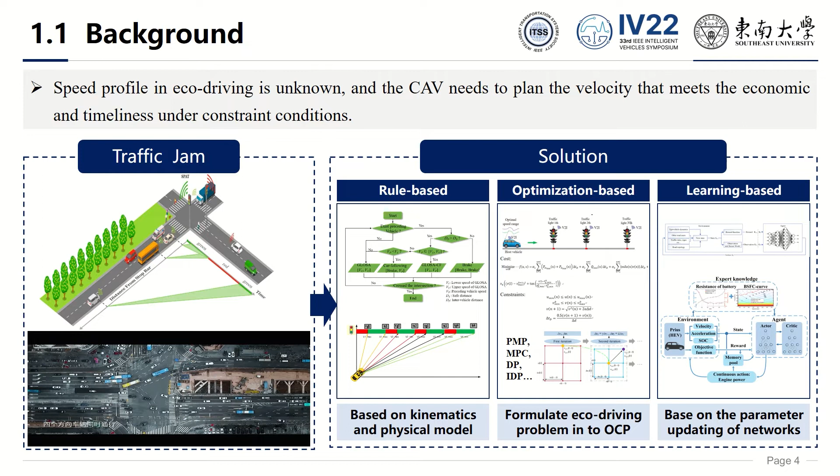However, it is difficult to achieve real-time eco-driving control for hybrid electric vehicles, since the speed optimization and powertrain energy management should be solved simultaneously. Therefore, we proposed a hierarchical control structure to solve the ecological speed planning and optimal torque distribution respectively.

Existing research usually focuses on series or parallel configuration HEVs and lacks comprehensive consideration of energy consumption factors. Especially for power split hybrid electric vehicles, we should consider the powertrain dynamics for precise optimization. Thus, we introduced an equivalent fuel consumption model to train an agent through proximal policy optimization algorithm.

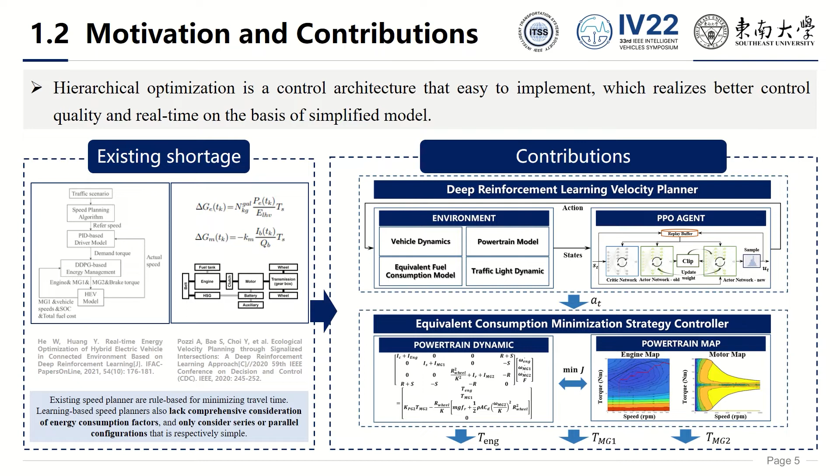It provides acceleration to the bottom energy management system. We applied an equivalent consumption minimization strategy, ECMS controller, in the bottom stage for real-time optimal torque distribution. Then I will introduce the methodology of this paper.

Toyota Prius is a classical power split hybrid electric vehicle, which is selected as our vehicle model. Its hardware structure and vehicle parameters are shown on the left, and its longitudinal dynamics and powertrain dynamics are shown on the right.

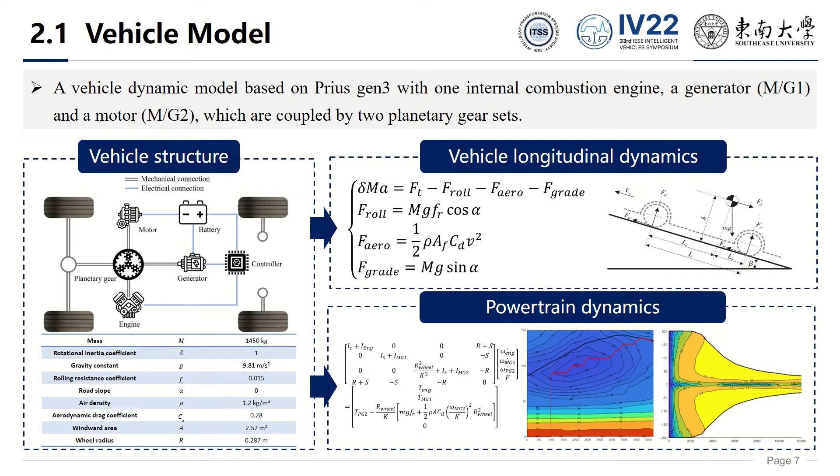In order to balance the computation and accuracy, we proposed a polynomial-based equivalent fuel consumption model to approximate energy consumption. We selected 7 different driving cycles, including NEDC, FUDS, HWFET, etc., and adopted dynamic programming to solve the optimal control in these driving cycles. We applied a constant equivalent factor with SOC penalty to convert battery energy into fuel consumption

for each step. Thus, we can obtain the equivalent fuel consumption in different power demands, and finally use polynomial fitting to get an equivalent fuel consumption model.

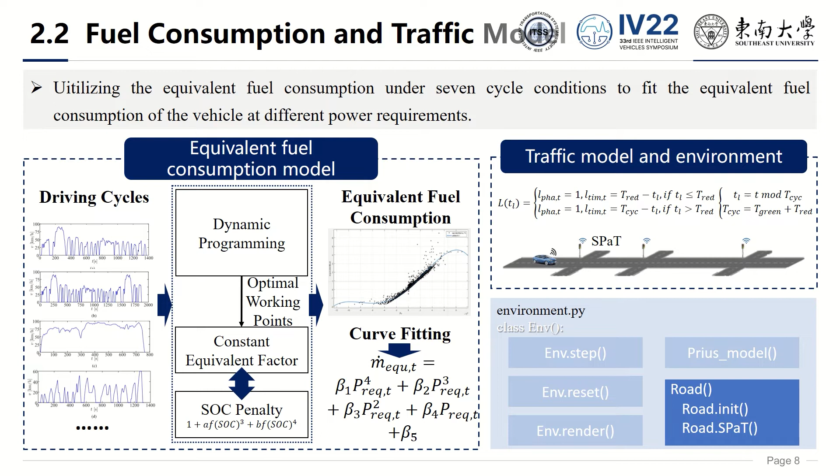In the traffic model, we ignore the yellow light for safety, and the traffic state function is shown in that equation. We assumed that the connected vehicle can only obtain the signal phase and timing information or SPaT information in the current intersection. The environment model is open access. If you are interested in it, you can get it in my GitHub.

Unlike traditional deep learning with labels, reinforcement learning needs to estimate state action value, and the advantage function is widely adopted. The loss function of the policy network or actor network in PPO is made up of the clip ratio epsilon and the advantage function A pi. PPO updates the policy within a trust region by the clip ratio, which guarantees the policy improves monotonically.

The overall objective function is listed here, and the constraint on the right should be satisfied by the bottom controller.

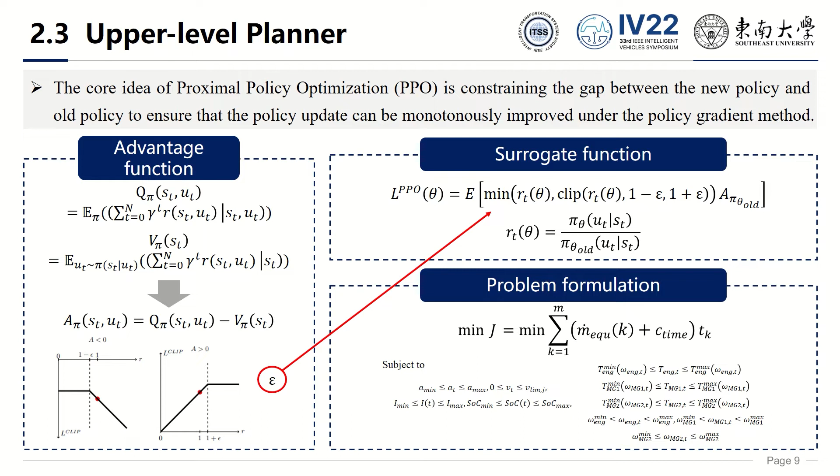ECMS is a classical energy management method for HEVs. The selection of the equivalent factor affects the optimization quality. ECMS calculates the cost table under the current power demand and finds the control output with minimized cost. We adopted a constant equivalent factor with SOC penalty to adjust equivalent fuel consumption.

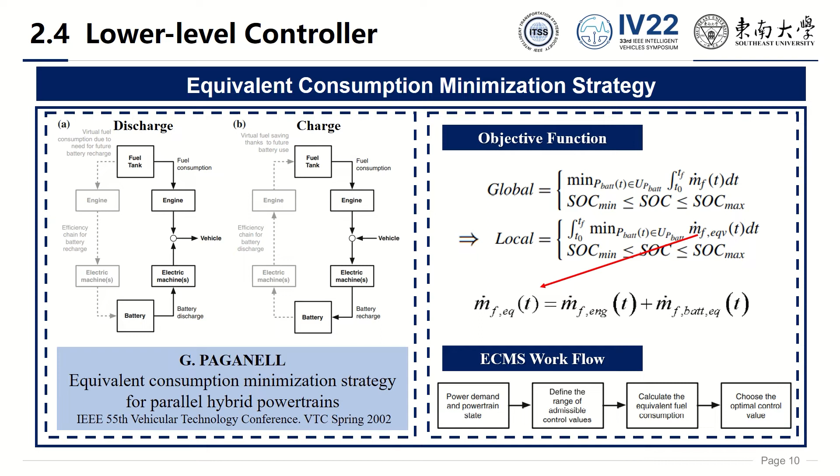Then I will introduce the simulation and the simulation result part of this paper. The deep reinforcement learning training is carried out under PyTorch framework and a custom gym environment. The version of Python packages is listed here. The hyperparameter is shown in table, and we choose an 8,000 meters road in Nanjing with 6 intersections for training. We discretize the simulation in space domain.

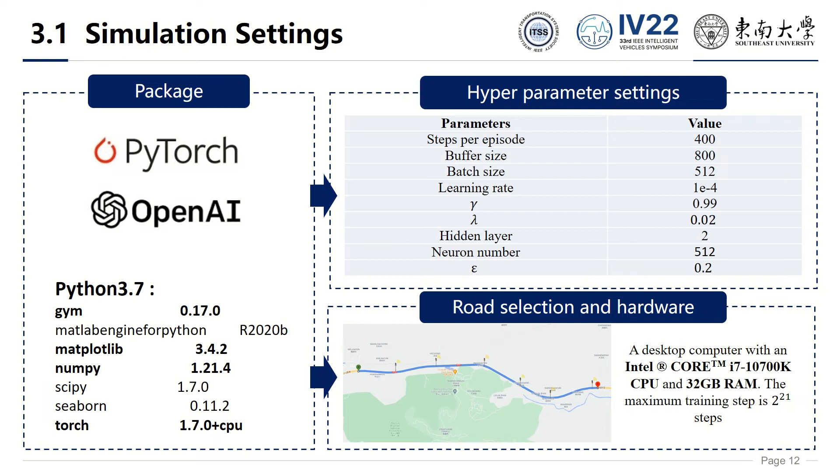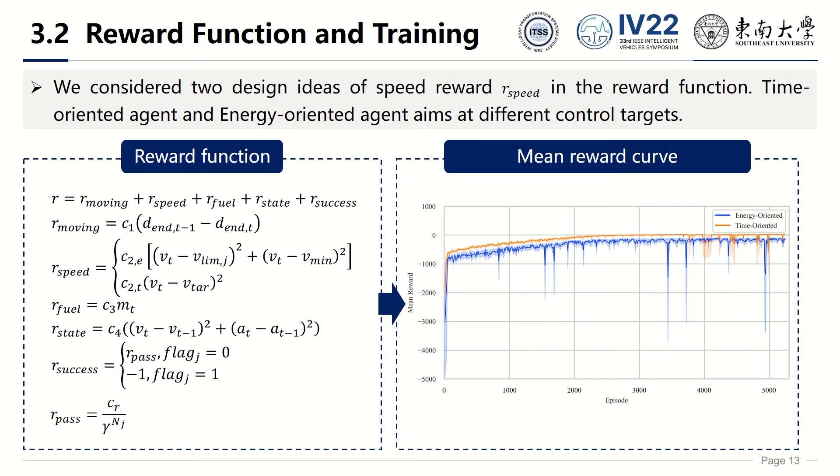We use 2 reference strategies in upper planner to compare the performance of the reinforcement learning agent. The first one is a rule-based speed planner, or a GLOSA system in other words. It generates speed recommendation according to the current speed information, and uses an intelligent driver model to generate acceleration command.

The second one is called Accelerate Constant Brake Strategy, or ACB strategy, which cannot receive speed information. It will accelerate the vehicle to the maximum speed in current road, and keep it constant until the vehicle has 300 meters left to reach the intersection. Then brake the vehicle to pass or wait.

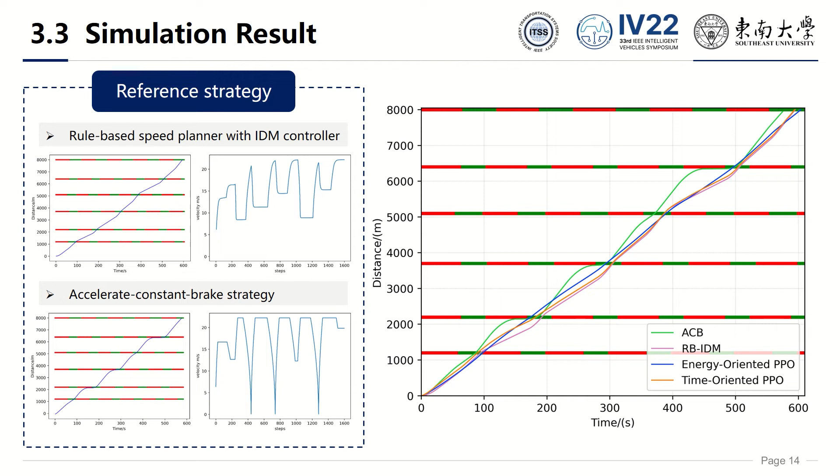The trajectory of the vehicle is shown in right figure. All of these 4 strategies use ECMS as their bottom controller to calculate the actual fuel consumption. It can be seen from the velocity trajectory that even if the ACB strategy has idling, it has achieved the shortest travel time, because it accelerated the vehicle to the road speed limit. But its SOC decreased most and has the highest fuel consumption.

To have a fair comparison, we adopted a fuel economy correction method to recalculate the fuel economy of PPO agents. The energy-oriented agent achieved 3.7 liters per 100 kilometer, and the fuel economy of time-oriented agent is close to 4.2.

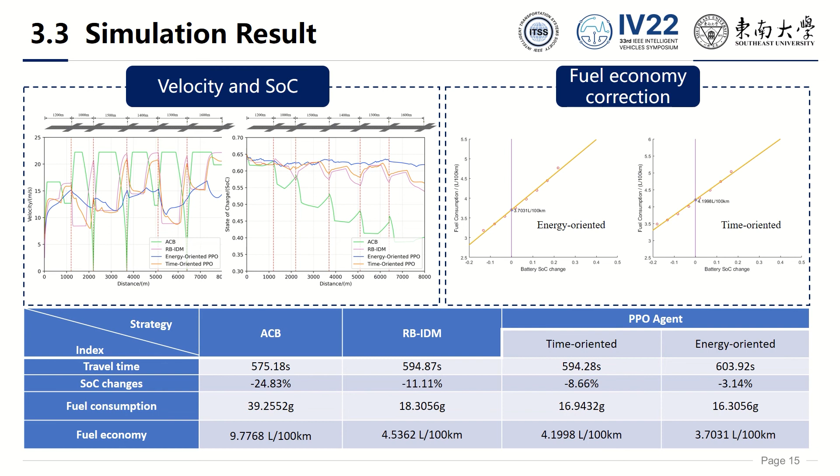We also applied the agent to untrained scenario. The freeze delay of the speed information in 6 traffic lights are initialized randomly, and 500 tests are conducted. It can be seen that the time-oriented agent has similar travel time to the RB-IDM, but still achieves 7.39% of fuel economy reduction on average. An energy-oriented agent achieves 11.98% of energy saving at a cost of 1.52% of travel time.

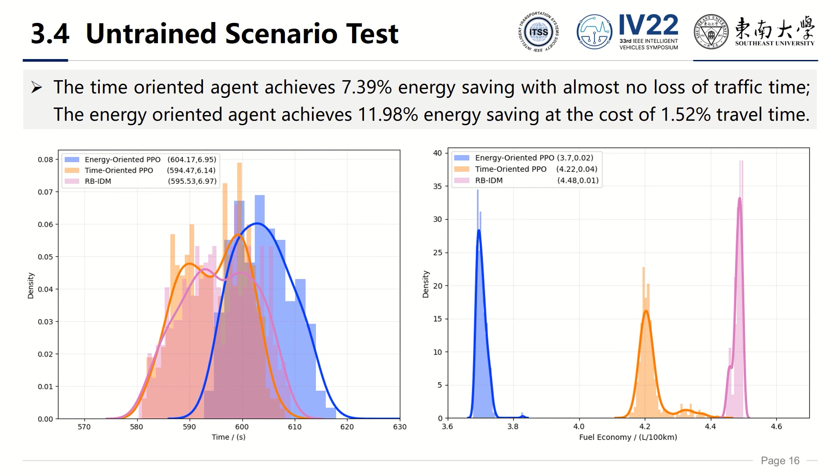In conclusion, this paper proposed a hierarchical control structure to solve the eco-driving problem for a power-split hybrid electric vehicle in urban scenario. Simulation proves that the proposed method has a great potential in energy saving. However, the safety risk of learning-based algorithms still exists when applying in the real world, and the potential of the reinforcement learning in the end-to-end control is not fully developed. In the future, we will overcome these shortages.